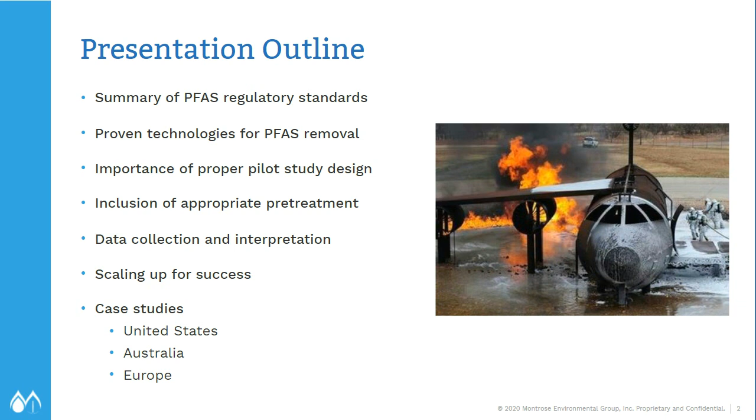So the next slide, ITRC. A lot of you are probably familiar with this organization, and the link is included here, but they have a good website that provides information on PFAS regulations, not just in the United States, but also in Canada, Australia, and in Europe. So that's worth checking out.

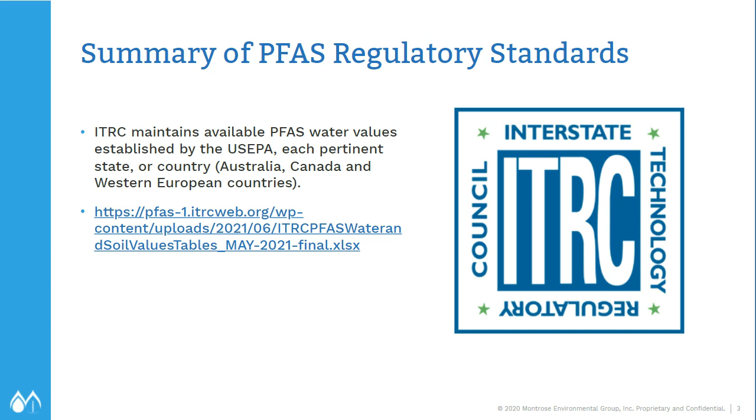Next slide, summary of PFAS regulatory standards. About half the states in the U.S. have published standards or guidance values for PFAS compounds. And not surprisingly, PFOS and PFOA lead the pack as the most regulated compounds. I've listed down below California, Michigan, New York, New Jersey, some examples of states that are either already below single-digit nanogram per liter or part per trillion levels, or are headed in that direction. And it's pretty amazing if you think about where we were just 4 or 5 years ago.

Things are really progressing. And if you look at New York State, they have designated PFOS and PFOA as hazardous substances, which gives the state the authority to enforce cleanup of sites that are contaminated with PFAS because they're deemed hazardous. New Jersey has promulgated MCLs for PFOS and PFOA.

So the states are beginning to promulgate MCLs, which is a big deal. They're also beginning to designate PFAS as a hazardous substance, which forces the cleanup. And then there's a bill, the PFAS Action Act. I believe it's on the Senate floor now.

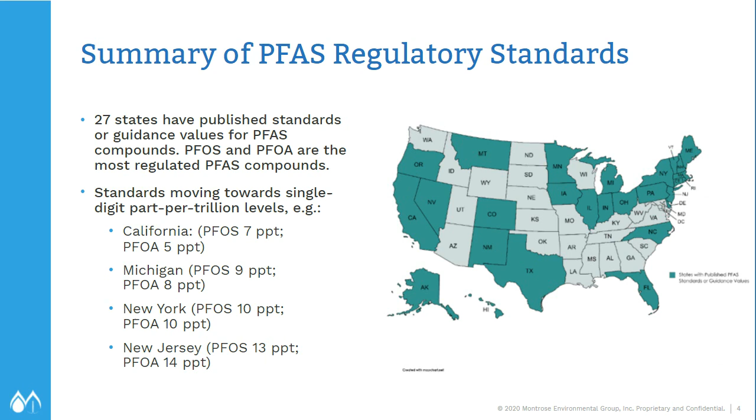But over the next 2 years, Congress will be requiring EPA to do these things at the federal level, forcing EPA to promulgate MCLs for PFOS and PFOA, designate PFAS as a hazardous substance, and even a hazardous air pollutant designation to crack down on incineration. So lots going on the regulatory front in the states.

So this is very current. This is where we're at now. And what we see are more states are promulgating laws, more compounds are being regulated, more stringent regulatory levels are being applied. So things are really on the move from a regulatory standpoint with PFAS, and it's going to be very interesting to see what happens in the coming months and years.

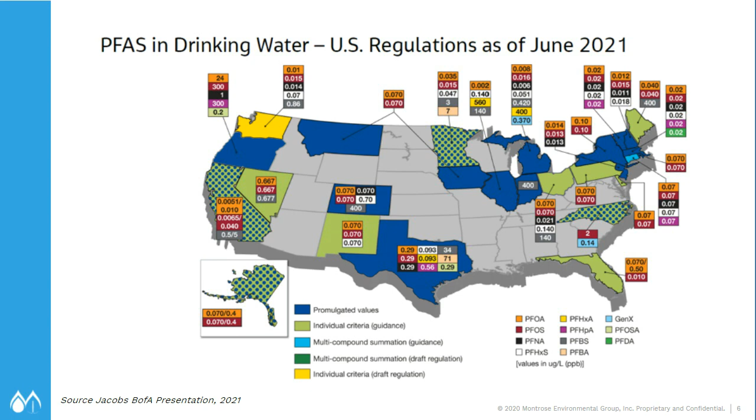So the next slide, we get into the global situation a bit. Australia, Canada, the European nations, they are at it as well. And if you look at Sweden, for instance, their guidance standards are focused on the sum of 11 specified PFAS compounds to less than 90. That includes PFBA, which is fairly notorious for being the most difficult compound to remove with existing technologies. Denmark is similar with the sum of 12 PFAS compounds, less than 100 parts per trillion.

And if you look at Australia, they're all the way down to 0.00023 ppb, or less than a part per trillion for PFOS. And that's not for human health. That's for actually the ecosystem, protecting freshwater environments and the organisms therein.

Other things going on in Europe, the European Food Safety Authority and Drinking Water Directive. This is really interesting, proposing strict limits for 20 compounds, and in a year and a half, January 2023, all EU countries must turn these into rules that are enforced. Individual countries can have even more stringent limits. And for now, drinking water is the primary target, but that's changing. We're seeing wastewater also being added around the globe, stormwater, soil, and groundwater.

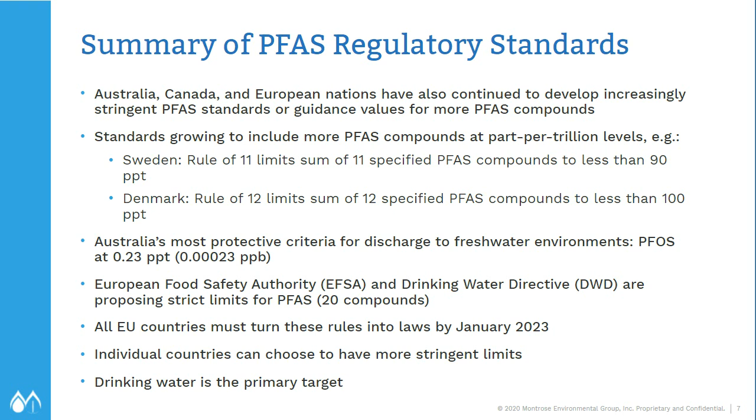So lots happening. The next slide, we're going to turn the discussion to proven technologies for water treatment. It's a bit of a review from previous presentations I've given, but I think it's important when you talk about piloting to understand what the options are to pilot for technologies. The incumbent technology, carbon, has been around for decades, and people are comfortable with it. I have a column in my basement for radon and manganese removal, and it has its place, and we're going to talk about what that place is a little bit here in the coming slides.

RO and nano use pressure to force water through a semi-permeable membrane. Those technologies are gaining traction. We'll talk about that a little bit more. Foam fractionation, relatively new, but it has its place. These compounds want to foam. They are surfactants, so in a lot of cases it makes sense to do this in a very cost-effective way to remove the compounds from the water matrix.

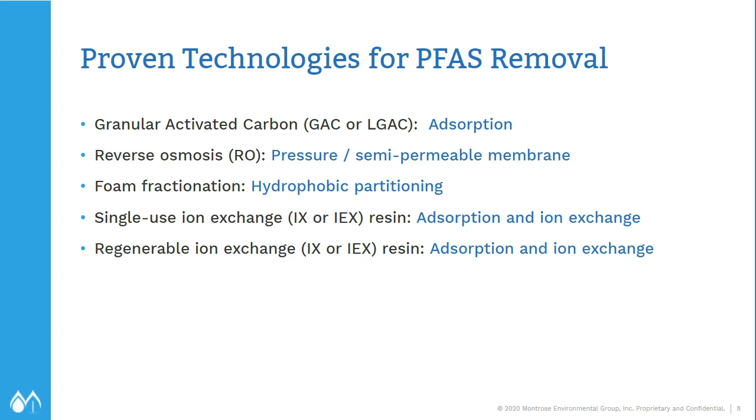And last but not least, ion exchange resin is really gaining in popularity, both single-use and regenerable, and that's largely due to the very high capacity because of the dual mechanism of adsorption and ion exchange that's at play. So granular activated carbon, being the incumbent technology, focuses on adsorption. That is the mechanism at play. Van der Waals forces are the attractive mechanism.

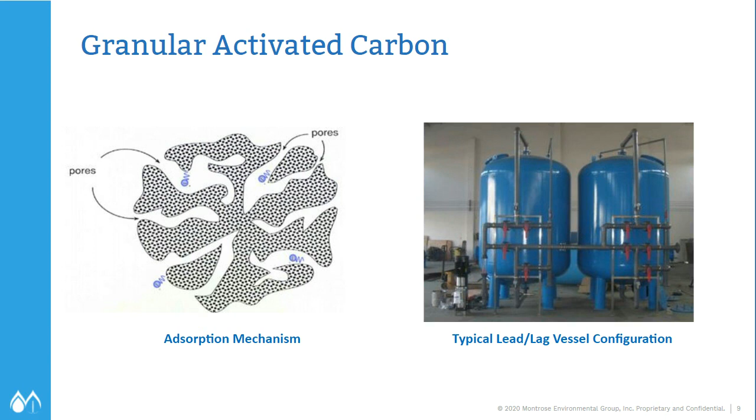The hydrophobic tails on these PFAS compounds don't fit well in the polar water matrix, so they tend to instead achieve a lower state of free energy by adsorbing onto the carbon. This works well for the long chains. Over on the right, you see the typical lead lag vessel configuration. Short chains, not so much. So we look at other technologies like reverse osmosis, which tends to do a nice job on the short chains. Sometimes nanofiltration can even be used.

The challenge with these membrane technologies is they always generate a reject stream, which is typically going to be somewhere between 10 to 25% of the forward flow. So it's sizable, and it can be as low as 5% depending on how many stages there are. But the bottom line is we need to deal with the reject, so it can often be used as a step prior to GAC and/or ion exchange resin.

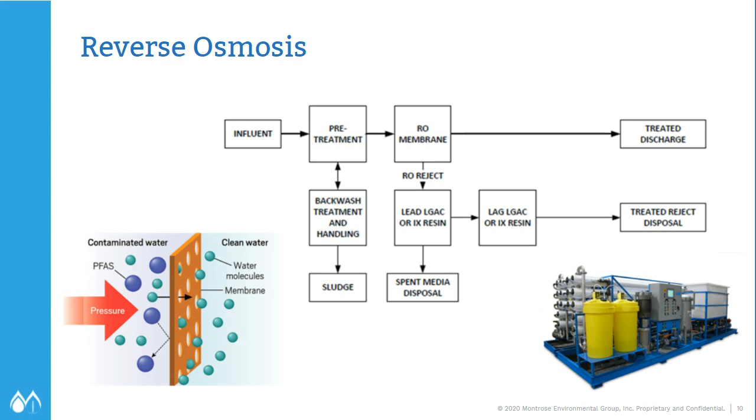So again, we're forcing water through that semi-permeable membrane, and I think we're going to see more applications of reverse osmosis in the future. Foam fractionation: probably most of you haven't seen a foam fractionation system at work. Our company is starting to use it more frequently, typically as a pre-treatment step.

Basically, the way that it works is you have the dirty water coming in the top of the vessel, flowing down through the vessel, and clean water coming out the bottom. This flows counter current to the air bubbles, which are introduced at the bottom of the vessel with a lot of turbulence. That whips the PFAS compounds into a froth. They form foam, which of course floats to the top and then can be skimmed off. So we're talking about largely plastic components, inexpensive, simple technology, very little, if anything, to clog, just that counter current flow of water and air.

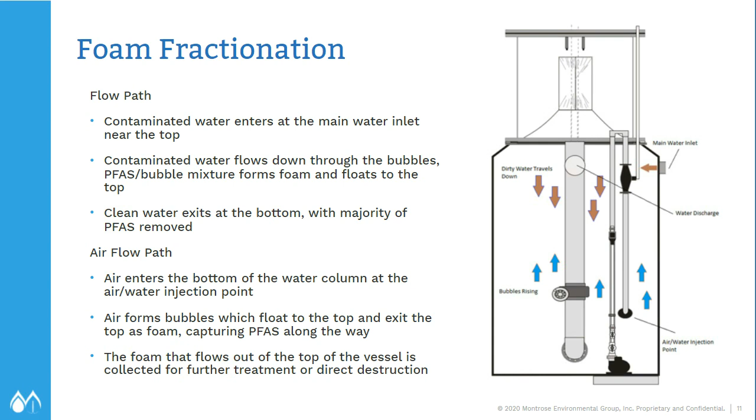It's a good pre-treatment step. It's good on nasty waters like landfill leachate, where you plug up just about anything else, whether it be a membrane or carbon or resin. Works well when you have high TDS, like high chloride concentrations, for instance, because it tends to be agnostic to chlorides. So definitely a place for foam fractionation now and in the future.

Ion exchange resin is really gaining in popularity because of that dual mechanism. The adsorption and ion exchange, we get rapid kinetics and higher capacity. We have a mock-up of a resin bead over on the right. Those blue dots are positively charged sites, which is where the exchange takes place. There are literally many, many thousands of those sites on a 1 millimeter bead. So this is obviously a simplified version.

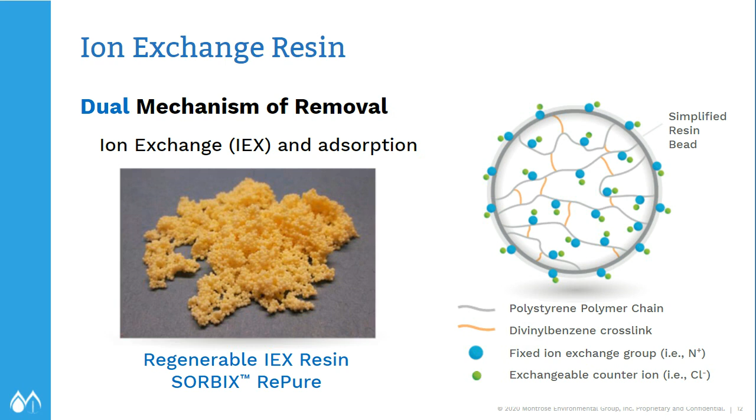But if we look at the next slide, this gives you an idea of how that typical PFAS compound is separated into its hydrophobic fluorinated carbon tail, and then it's typically a sulfonate or a carboxylate, which has a negative charge and is hydrophilic or water-loving, at the other end. That's where the exchange takes place. The adsorption is on the hydrophobic tail. Opposites attract, so that's why that negative head is attracted to the positive charge on the resin site.

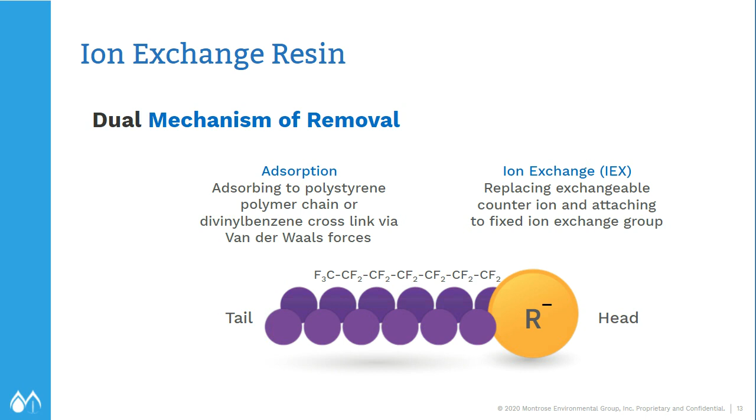What does that mean? Well, it means if exchange happens a lot faster than adsorption, then resin systems are going to be smaller than carbon systems, and they are. And this gives you an idea of that stark difference in footprint. And even with this difference in size, the resin vessels tend to be changed out or regenerated less frequently than the carbon in those carbon vessels. So some real distinct advantages over carbon.

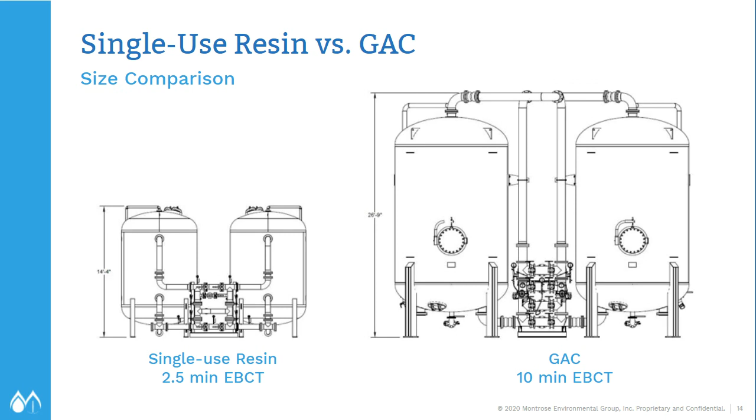And how do we make it more sustainable? Well, our company has developed and patented a process to regenerate ion exchange resin on site, in vessel. All these technologies typically have some level of pretreatment before them, other than possibly foam fractionation. After that, just like carbon or single-use resin, we have lead-lag ion exchange resin. Maybe there's going to be a polish resin depending on if we're going after short chains too.

But what we've developed is a solution, a blend of alcohol and brine or salt, so that once that lead vessel is saturated with PFAS, it can be taken offline and regenerated with this regenerant solution, which washes, if you will, the PFAS compounds back off. They're collected, sent through a distillation process, which recovers the regenerant solution for reuse. And what we're left with is a very small quantity of liquid brine with very high PFAS concentrations.

We have also developed and patented a process called superloading that further reduces that volume by about another order of magnitude into a solid waste. So just round numbers, by way of example, this would be typical: 1 million gallons of fairly heavily PFAS-contaminated water. After the removal, the regeneration, the recovery, the distillation, and the superloading, that 1 million gallons boils down, if you will, to less than a gallon of solid waste.

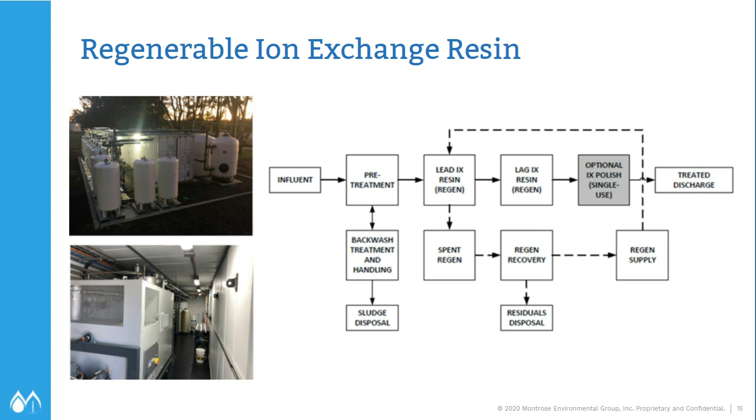Okay, going to shift gears again here and get into the pilot studies and the importance. What are the elements of a good pilot study? It has to be designed well, right? And that starts with an accurate design basis. What does that mean? Well, we need to understand the properties of the water to be treated. It's not as simple as just knowing PFAS compounds and their concentration. What else is in the water? How much iron? How much natural organic matter, as measured typically by TOC? What about TDS, chlorides? All kinds of things, it could be colloidal compounds, silica.

We need to understand and have a good grasp on the water that we're going to be treating, and that helps drive understanding pretreatment. We also need to understand what's the desired outcome. Are we just trying to remove PFOS, PFOA to less than 70 ppt? Or do we need to remove some of the short chains too? And if so, which ones? What about precursors? Pretreatment, we're going to get into some examples of that, but it's extremely important to pay attention to that.

What are the site requirements? Where are we getting the water from? Is that source representative? Is it coming from a pressure main or a deep well or a break tank? Or do we need a break tank? Where's the treated water going to be discharged to? And here's one. The hydrogeo considerations are often not given enough attention or outright neglected. What happens is there'll be some low flow sampling that takes place from these monitoring wells that have been sitting around for years. Maybe there's been some sort of pump test, but oftentimes not enough.

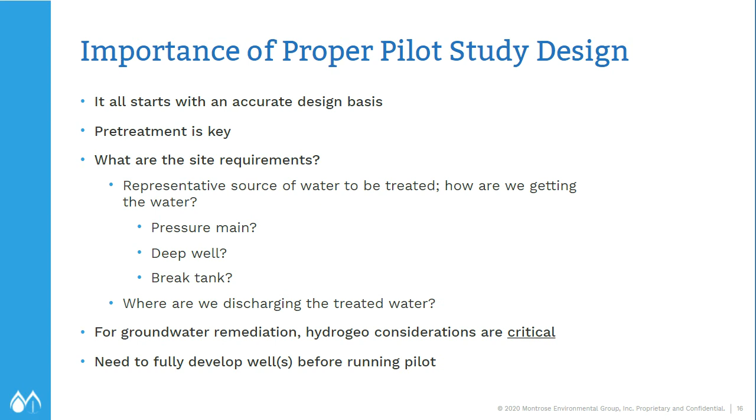So bottom line, based on the design basis, a foam fractionation system was installed for pretreatment, but was never used, because once the extraction wells started up and moved water through the source zone and through the aquifer, the levels dropped by 2 orders of magnitude, dropped 100-fold. And that was supposed to be the foam fractionation system's job, to drop the levels by about 100-fold, basically 99% or even more than that, and it just didn't come to fruition. It wasn't needed, because that pump down test was not performed up front.

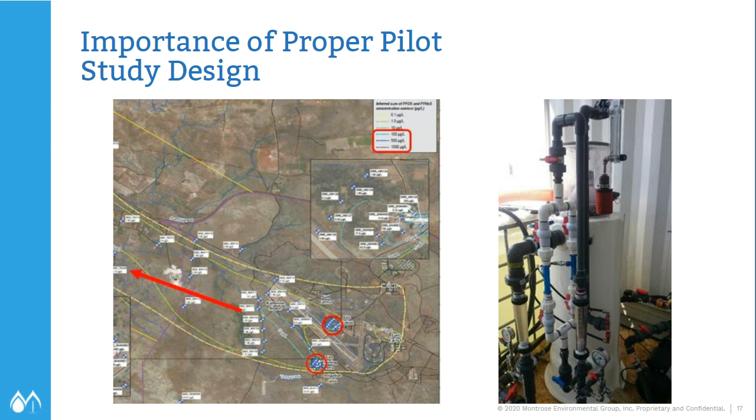So some good lessons learned for us there, to demand that the proper pump down test be done to give you an accurate view of what the concentrations are going to be when your full-scale system starts up and starts moving water through the aquifer and the source zone.

So we need to understand what we are looking to pretreat. Is it suspended solids and iron? What state is the iron in? Will sand filters or bag cartridge filters work? Will they be representative? Is there colloidal fouling matter that is going to need to be coagulated and flocculated and settled out? Are there metals that are going to need to be precipitated?

What about any biofouling? Carbon, backwashable carbon, is good for removing solids and TOC. There are lots of specialized resins. We've used them to remove iron and natural organic matter. Some metals can be effectively sequestered or handled with pH adjustment. Biocides or organic dispersants can be used to control and prevent biofouling.

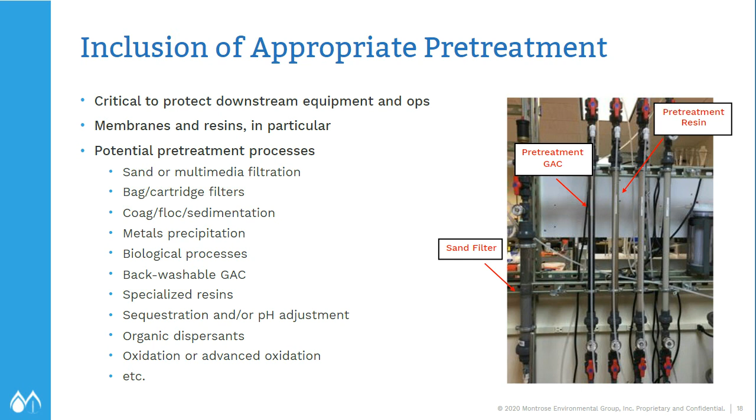removing PFAS, but letting the chloride flow through, so that when we got to the next step, which was anion exchange resin, the capacity of the resin was improved significantly, because the chloride was no longer with the PFAS. Right, the concentrations of chloride were greatly reduced in relation to the PFAS, and the volume was less, so we could use smaller vessels.

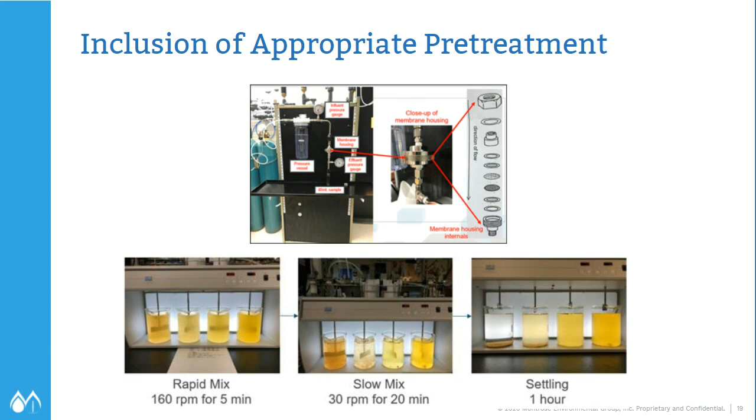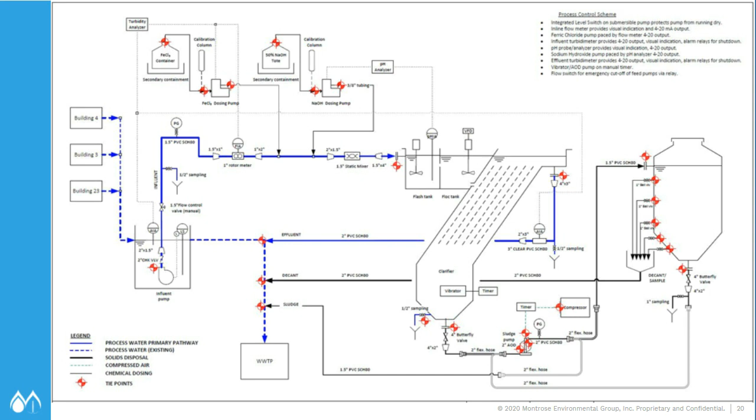It's all about the data, and the importance of data collection is often underestimated. You can't rely on the client, even if they say they're going to do it, to run your pilot. Only in very selective cases can that work out. These pilots are substantial investments, and we need to give them the care and attention they deserve. And my mantra: bad data is worse than no data. And if you go to conferences, there are a lot of bad pilot studies out there that people present on. So you need to plan the test, run the test, and do it right.

When we run a pilot, our operators put out daily summary emails that the greater team reads. We have daily support calls to talk to the operators and make sure they're comfortable with the way things are operating and the data that's being collected. And another thing, you can't be afraid to hold samples. Don't feel like you have to send every sample in that you collect. It's a lot more cost effective to stash some in the fridge or the freezer.

There's no scientific basis for a 14-day hold time for these forever chemicals. If there was, we'd put them in the fridge for 14 days and we'd have our problem solved, right? So hold those samples and save a bunch of money. In some cases, the regulators are involved, and it gets a little tricky, and you need to adhere to the 14-day hold time because these are deemed for compliance, but a lot of times pilot tests are for information and not for compliance. So we need to take advantage of that and common sense. And once on paper, the data set takes on a life of its own, so we need to collect good data.

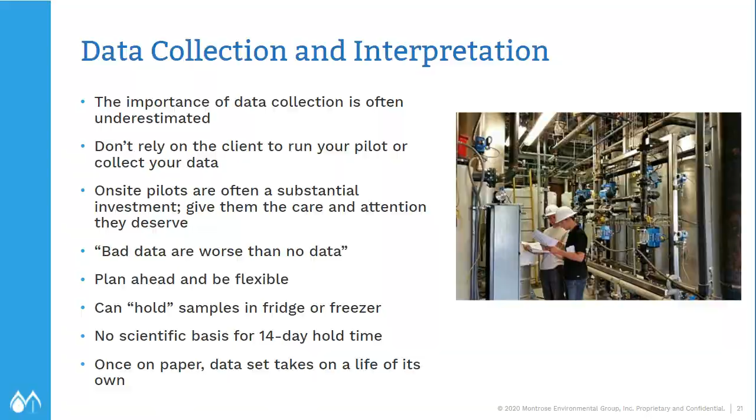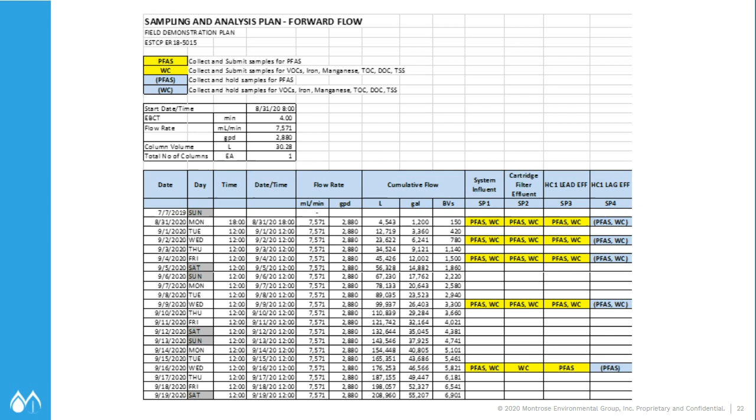Moving on to scale, very important to pay attention to scale. And that all depends on what process or processes you're going to be piloting. Resin and GAC columns tend to scale up well and don't typically need to be bigger than 2-inch diameter columns. Some of the solids removal, the coagulation, flocculation processes need to be scaled up for the pilot test. Same with some of the chemical processes. And we just need to understand what we're doing in the way of treatment and how well those processes scale.

Do you need a sand filter? Can you use a bag or a cartridge filter to simulate? Well, it depends. If you're using a regenerable resin process, are you going to have enough spent regenerant solution to do the follow-on testing like superloading or on-site destruction?

So often the question is, how big is big enough for that pilot test? And a lot of that depends on how big does it need to be to get the client and the regulators on board, because you hate to spend a bunch of time and money running a pilot test only to have it be rebuffed by the regulators, for instance, because they don't think it was a large enough scale to be representative.

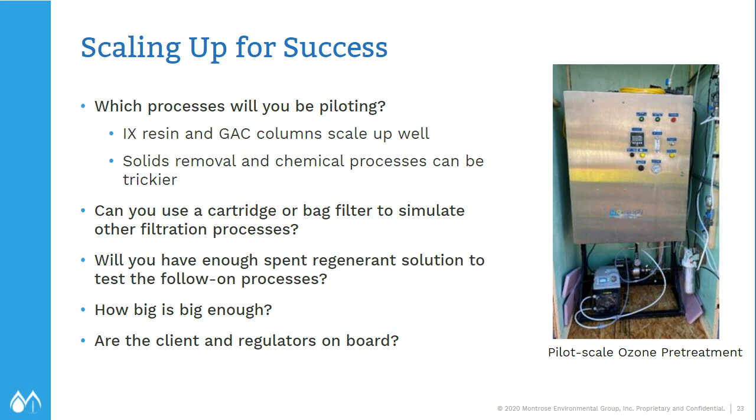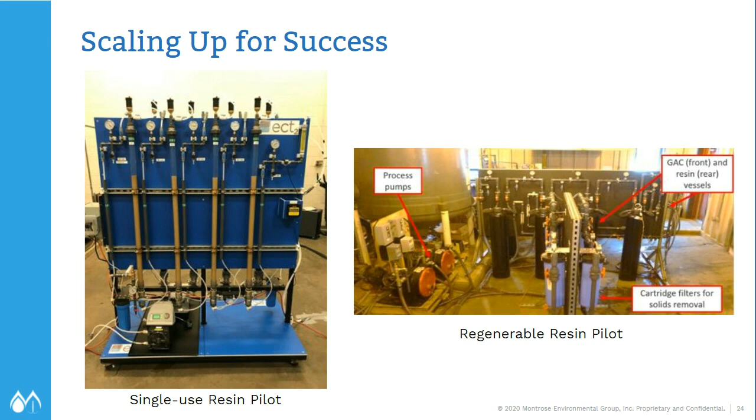Okay, on to the case studies. First one I'm going to talk about took place in Australia. This was a few years ago, 2017-18 timeframe. We started up a system that was designed to remove PFAS from stormwater that was flowing off-site from a defense Air Force base.

So we quickly set into motion a side-by-side pilot scale system in the very shipping container that was holding a lot of our full-scale equipment, and tested 18 different media to see if we could find one that would be effective at removing the majority of that iron organic matter complex. And the clear winner was identified and successfully implemented at full scale.

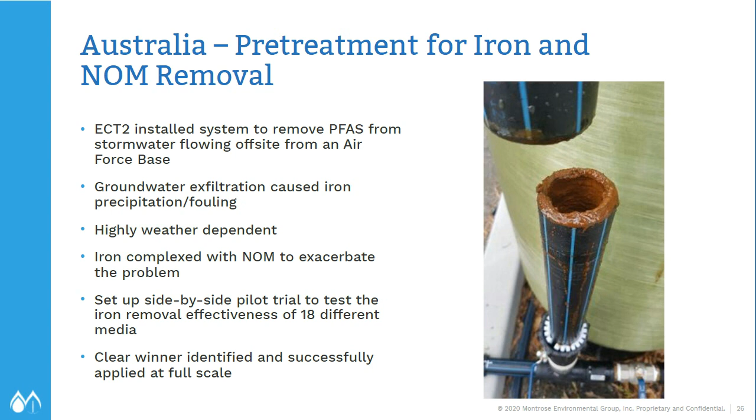So that resin has been working in place with periodic cleanings for years now, protecting the downstream PFAS removal system, which is a different type of resin, and periodically restoring capacity with the brine regen, and sometimes a little more aggressive regen on an infrequent basis.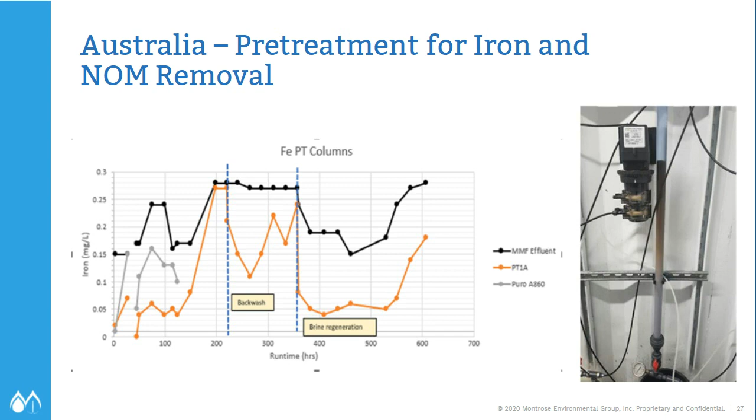Over on the next slide, this was a side-by-side test.

Excuse me, grab a drink of water here.

Of a single-use ion exchange resin versus a carbon, and it's a New England public drinking water supply. The inlet PFAS in this case was greater than 2,500 ppt, or 2.5 micrograms per liter, not your typical drinking water well. And what was done here, a lot of things were done right. The data were collected successfully. Attention was closely paid to the pilot. Daily discussions, daily report outs.

An independent consultant was hired to help design the test and interpret the data to develop a life cycle cost analysis, which is the only way to really get to the bottom of what is the right technology, right? If you need to run a pilot test, which we often do because this is relatively new contaminant, new technology, there's nothing like doing it side by side, collecting the right data to run that comparative life cycle cost analysis.

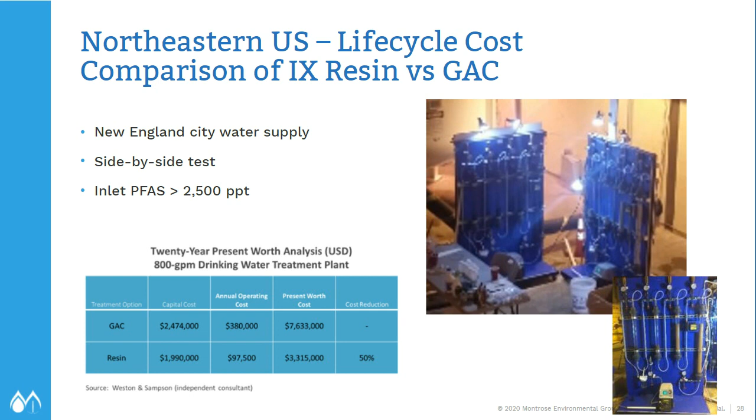These are some of the breakthrough curves for that test. We see carbon on the left, resin on the right. The black dotted line is the influent PFOS plus PFOA, and you can see that over on the left, an empty bed contact time of 10 minutes is needed to get any reasonable capacity out of the carbon at this high, 2,500 part per trillion influent level.

But you notice the resin on the right went for over a year, and the smallest vessel, 1/4 the size of the one that worked okay in carbon, 2.5 minute vessel lasted for over a year. So definite advantage resin there.

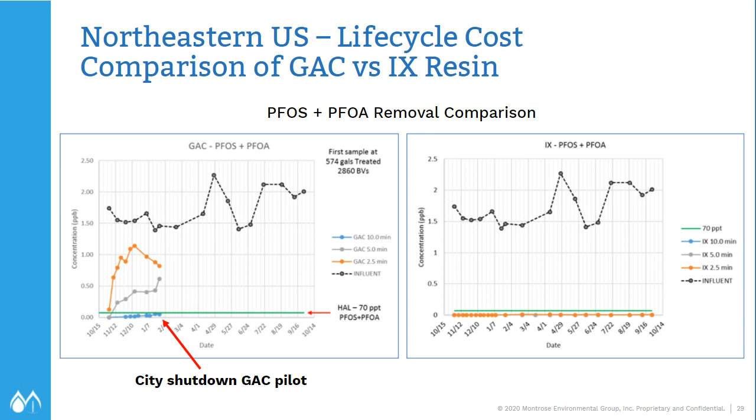On the next slide, we also looked at the short chains. Interesting that PFBA broke through carbon at first higher than the influent. That's called chromatographic displacement. And then over on the right, more classic breakthrough curves of the 2.5, 5, 7.5, and 10-minute columns.

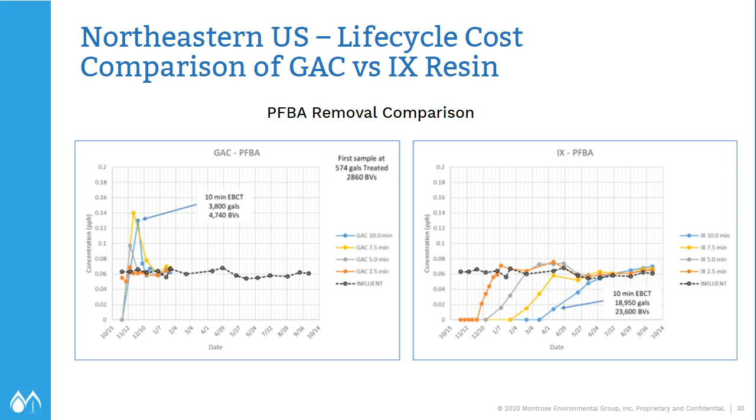Next case study. This was an interesting one. Really interesting because it wasn't just PFAS. It was a lagoon that was collecting de-icing fluid, propylene glycol. It was filled with iron bacteria and hundreds of ppm, sometimes I think even more, of propylene glycol, which is extremely biodegradable.

And we knew starting out this one, we were going to run a side-by-side pilot to stay ahead of things. We started it ahead of time, and we used it as our canary in the coal mine to figure out if we were going to have to do anything, especially to address the biofouling concerns that we knew were going to come with the active biogrowth on our media due to that highly biodegradable glycol solution. So we also coordinated with our R&D lab to find the solution to the biofouling and get ahead of it.

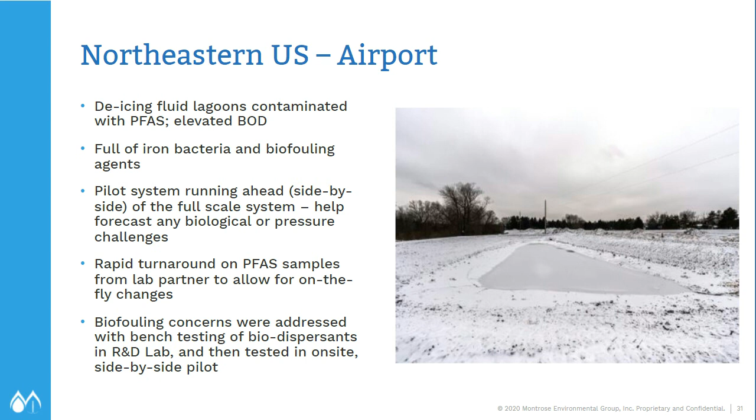And it turns out that if you look over on the right, the black growth that you see in that resin column is the beginning of a very substantial colony of bacteria that are chowing on the propylene glycol coming from the lagoon. Because basically they're collecting de-icing fluid off the runway, but they also do fire training, so there's a bunch of PFAS in there too.

So our R&D folks in the lab looked at a bunch of different biodispersants and found one that not only works very well in preventing the bacterial growth, but also the destruction could be catalyzed simply by having a small vessel of carbon at the tail end of treatment. And it also, this particular one didn't impact the resin's capacity. Some of them actually used up sites on the resin.

So it was a real victory in the R&D lab that was translated to the pilot scale to prove out on site, which was running ahead chronologically of the full-scale system that you also see down in the bottom middle. And so a really cool project, very successful. And 2 other entities had been in there before us and failed. And our approach to piloting won the day there. And we're still on site a year and a half later.

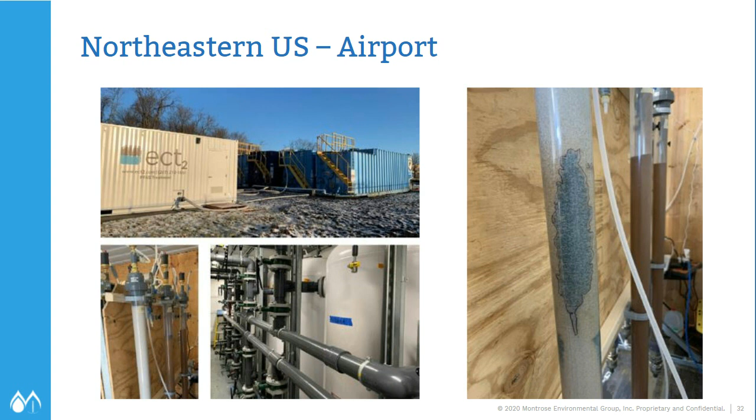And this plot just shows the outstanding results. The effluent has been consistently non-detect for a year and a half, below 1 part per trillion for PFOS and PFOA. This is treated water being discharged to the municipal sewer and flowing to the POTW.

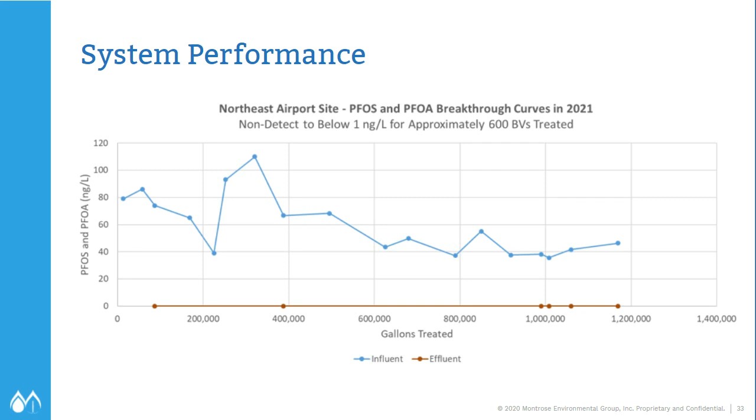The next slide shows a pilot test at an Air Force base in the Midwestern United States. The idea here was to not only look at regenerable resin, but also to look at destruction of the still bottoms from the regeneration process. So we teamed up with AECOM on this one and their DE-FLUORO electrochemical oxidation process.

Over on the left, you see inside a shipping container a resin system with a sand filter pretreatment system with a tank to hold and thicken the solids from backwashing the sand filter. Over on the right, you see that resin regeneration system and regenerant solution recovery system, complete with distillation to take the high volume, low concentration PFAS in the groundwater and turn it into very low volume, very high concentration solution

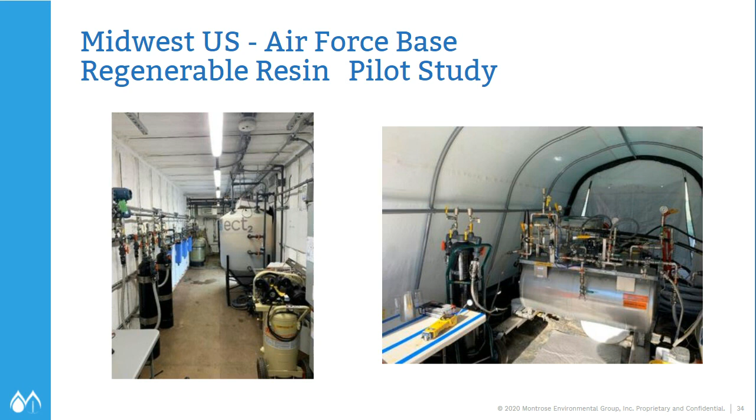that could then be destroyed using, here on the next slide, the DE-FLUORO process developed at the University of Georgia in conjunction with AECOM. That DE-FLUORO process couples very well with ECT2's regenerable resin process. And so this was a really, really cool pilot study.

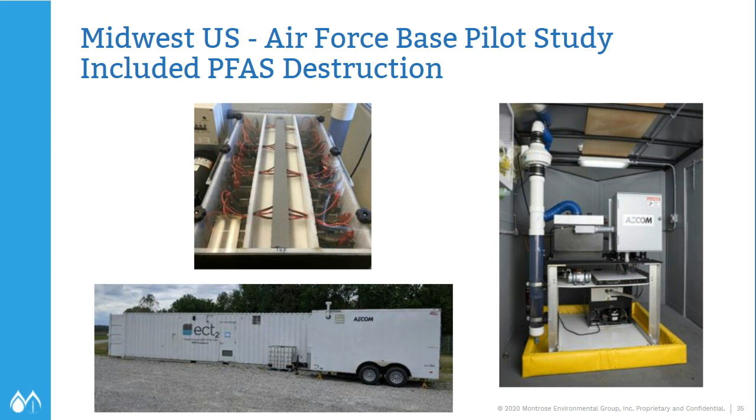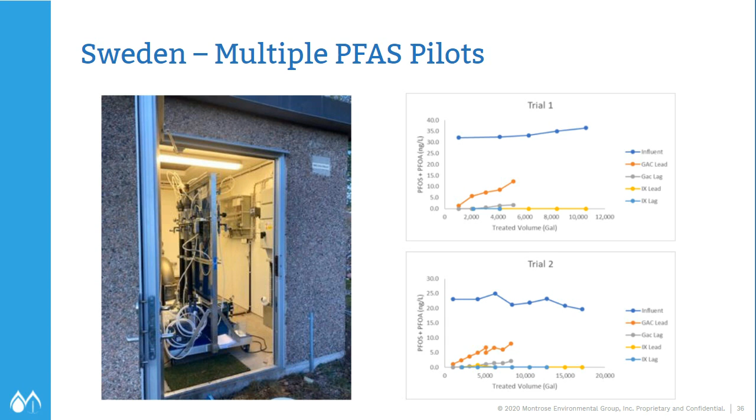This next slide just shows a system. We're starting to do a bunch of testing in Sweden. Sweden's really picking up steam on the PFAS front, not just drinking water, but also groundwater remediation, landfill leachate, wastewater. And so again, just some typical data you see over on the right, where the resin is lasting a lot longer than the carbon. The next slide just shows a couple other pilots being performed by our team in Sweden.

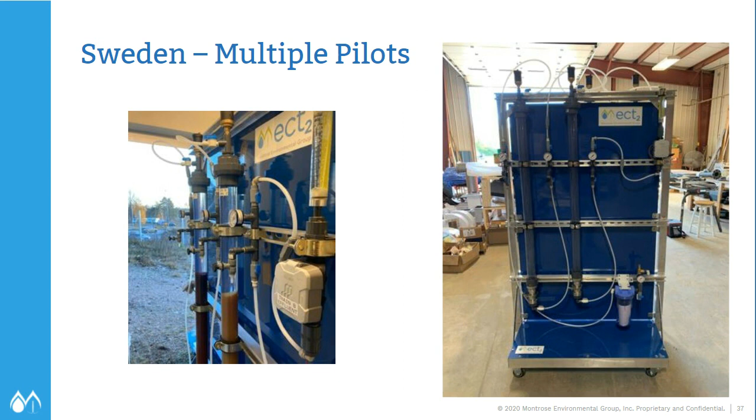The next slide shows another public drinking water supply pilot. The interesting thing here is that we really need to speed up the test. One of the biggest challenges with pilot testing, even column testing in the lab, resin for PFAS removal, it can take longer than a year to collect enough data to show breakthrough, and that's untenable.

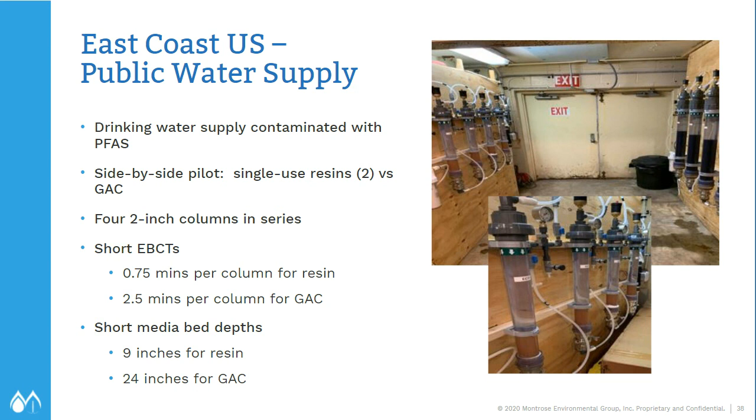So typically you want 30 to 36 inches of total bed depth, but we did 4 columns in series. For the resin, they were each 9-inch resin bed depth, so 9 times 4, 36-inch total bed depth. We kind of took a flyer on this one, but it worked really well. And so you see the 3 different sets of columns, 2 different resins and 1 carbon.

So this is my last slide. I wanted to finish at 2:45, so I think we're pretty close. I want to save plenty of time for questions, but I do want to take a little bit of time on this slide because the take-home messages are interesting, compelling, and important.

We have to keep an eye on the regulations, right? You need to know what's going on in the state or the country that you're working in. They're evolving. They're only going in one direction, and that's down. And laws are actually being enacted and enforced. We're having 20 compounds now instead of 2. It's really an evolving landscape, more compounds being added. The limits are starting to drive down into the single-digit nanogram per liter or PPT level.